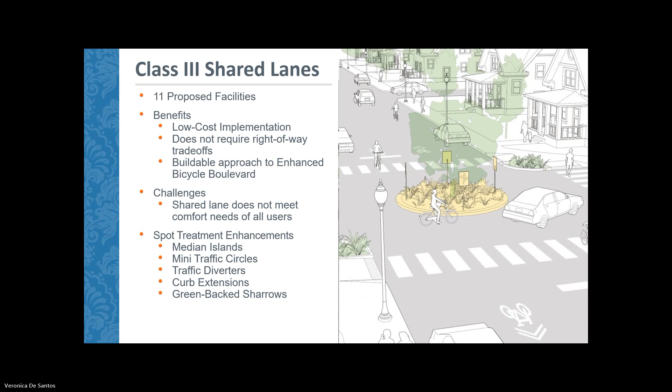In the next image we have traffic diverters. These are used intermittently throughout a corridor to redirect motor vehicle traffic to other roadways that will be more accommodating to carry that additional volume. It provides the bicyclist with gaps where motor vehicle traffic is lower, increasing comfort and decreasing stress. This wouldn't be a bicycle-only corridor throughout the entire length — just at intermediate or intermittent locations.

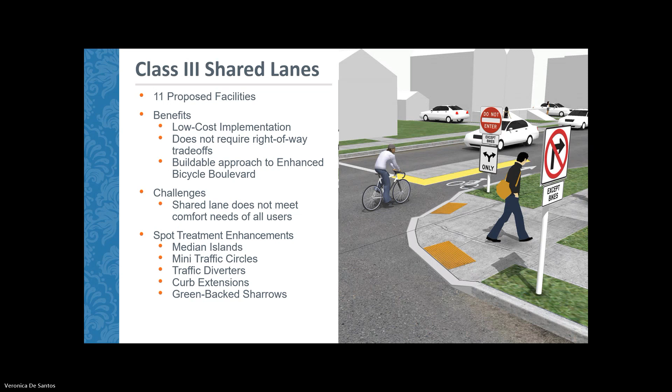The next spot treatment enhancement is curb extensions. Some of these have already been implemented in the city. They essentially increase the space around the curb, so motor vehicles must make a slower and tighter turn around, which calms traffic and enhances safety.

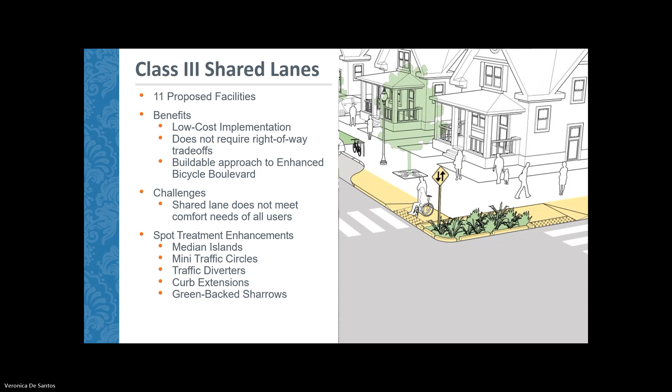And then the last one is green-backed sharrows. The standard sharrow symbol is just white on the pavement — these essentially elevate the visibility of the sharrow marking.

Next slide, please. The next class is a class 2 bike lane. These are quite typical, seen on locations around the city such as Harris and Henderson.

Some spot treatment enhancements that can be added to class 2 bicycle facilities include left turn bike boxes, shown in the next image. These are used at traffic signals: if a bicyclist wants to make a left-hand turn approaching the signal at a red light, they're provided additional space at the front of the travel lane so they can navigate to the left side of the roadway and make that turn when the light turns green.

In the next image, this is a second type of left turn facility for bicyclists in a bike lane at a signalized intersection. For this one, the bicyclist essentially completes the left turn maneuver in two movements — as you can see in the bottom right-hand corner, there's a bicyclist approaching the intersection.

If they wanted to make a left turn from here, they would continue straight through the bike lane and then pull over slightly to the right to queue in that green box. That would be on a green light, and then they would wait for the green light in the direction where you can see the white sedan traveling. Once that light turns green, they would be able to continue through the intersection and make that left-hand turn.

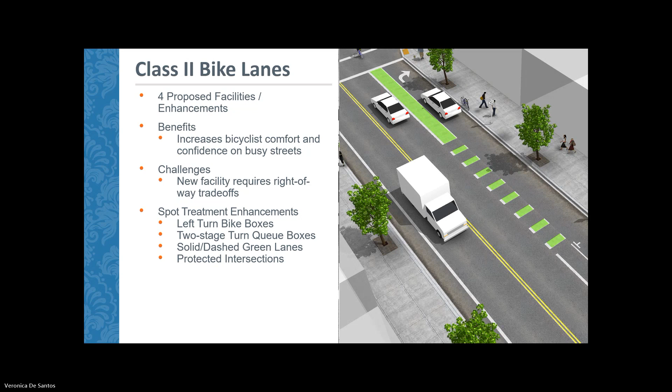For the last one, we have protected intersections, which essentially utilize paint and curbs in extension of the existing curb, where you see many of the pedestrians in this image, so that vehicles making a right turn through this intersection complete a slower maneuver, a tighter right turn, and the bicyclist is protected using those curbs which surround their queuing area.

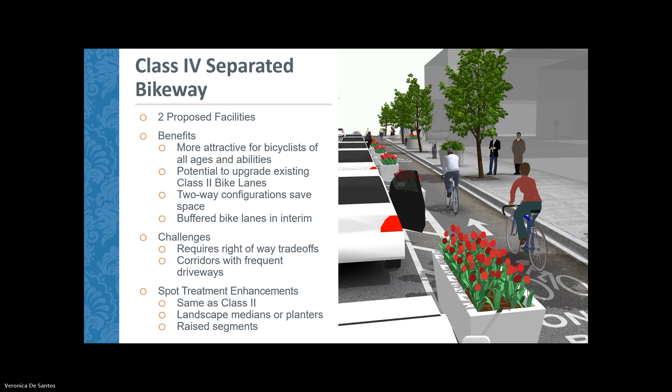So those are the 4 primary types of bikeway facilities that we'll be presenting in this plan. In the next series of slides, we'll be getting into the different corridors that are proposed, and then the public survey that we have open for this phase of the project.

We do have on the next slide some additional spot treatment enhancements. As we further the Eureka bike plan and start identifying which corridors are most prioritized by the community and by different metrics that illustrate the corridor itself will be successful in implementation or qualifying for grant funding, that's when the design of spot treatments on the corridor itself will start to be developed.

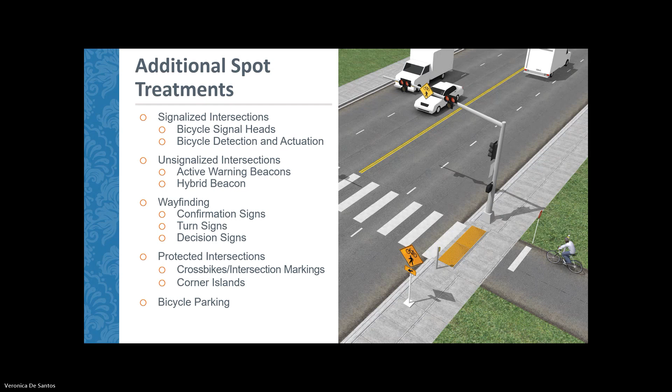And there's a couple locations where these are implemented within the city already, such as at the intersection of Spring Street and Henderson Street. And then the next image includes wayfinding. So wayfinding is a beneficial way to help guide bicyclists through the network and make decisions based on where they're trying to go. So we all use some form of Apple Maps or Google Maps on our phones, and this is essentially just a physical mapping device for the bicyclist so that it lowers the stress on them as they're trying to navigate to where their destination is.

And then second to last, we have protected intersections again. So this is just another example from a different perspective. So you have some cross bikes through the intersection, which are those green dashed lines. Cross bikes, you can think of them like crosswalks. It essentially delineates the bicyclist path of travel through the intersection. And then you can see on the left in the image the corner island of concrete so that the vehicle would essentially make its turn around that.

And then in the last image, we have bicycle parking. So depending on where the top corridors are and where the most activity occurs, bicycle parking could be an improvement near key destinations.

Okay, and then we'll go ahead and jump into the overall map. So what we have here is the city of Eureka, and in the 4 color codes, we have the different classes of bikeways that were just discussed. What you see in solid lines are bikeways that are currently existing or programmed. So when we say programmed, we mean that it has been funded through construction and it is going to be part of the network in the next couple years. So we've shown these programmed improvements as existing so that we can better understand where to propose corridors in order to create a full network.

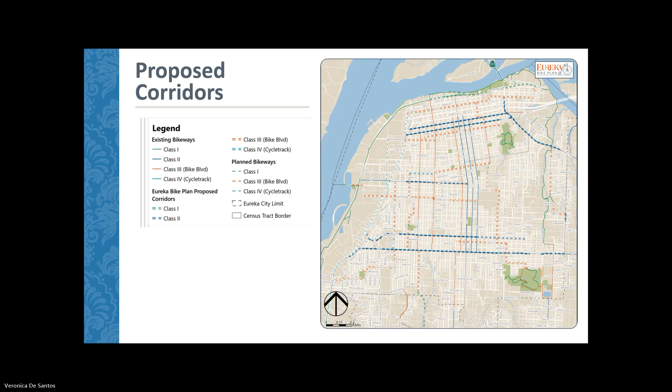The link will be active for 2 weeks. That's all that Mentimeter will provide. At that point, we'll go ahead and refresh the link and provide an updated one. So the survey will be open for a total of 1 month. So you can complete the survey now, or you can complete it at a later date if you want to have more time to review the proposed corridors. But all participants are limited to 1 response.

So the first question that will be presented to you when you open the survey is one in which you're assigned 100 points. And then the task for that first question is essentially assign the 100 points to the corridors that you would prioritize the most. So you could essentially choose 10 different corridors which you prioritize equally, or you could choose one corridor that you prioritize the most and assign all 100 points to that corridor. It's up to you. You can do any split of that 100 points in groupings of 10. And this essentially will indicate to us which corridors are top of the list in terms of the community's preference.

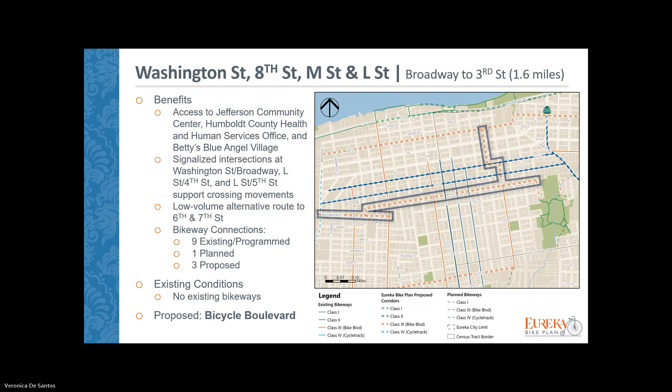Hi there. I'm going to give Jay a little break. Thank you, Jay, for all that. And as a reminder, we'll walk through each of these corridors. And then the idea is that everyone has an opportunity to use the Menti survey tool to weigh in and help provide your input, whether you're participating tonight in real time in the workshop or after the fact and just watching the video. So I wanted to take a couple slides and talk about two corridors in particular.

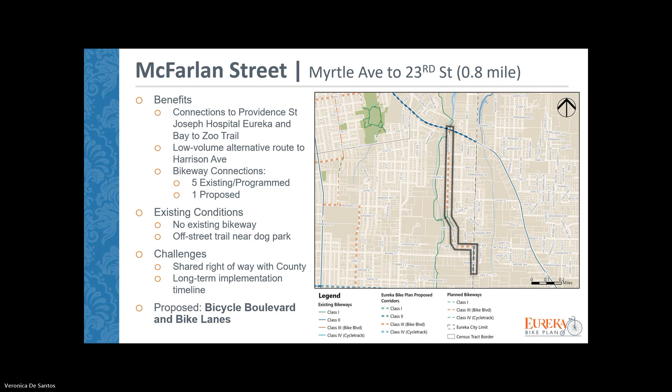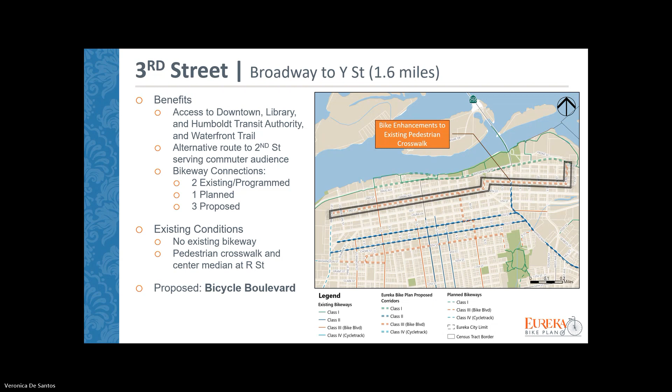And then with each of these, as Jay has mentioned too, we've identified some of the benefits. So we talk about access in the downtown, connection with the transit authority, other important facilities like the waterfront trail or the library in the downtown area here. Today, there's no designated bikeway here, and the bicycle boulevard would provide that opportunity to really encourage and enhance bicycle travel in the east-west direction there. All right, I'll hand it back off to Jay for a few more.

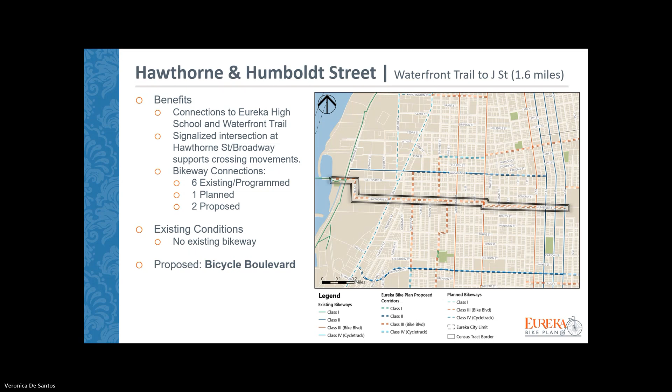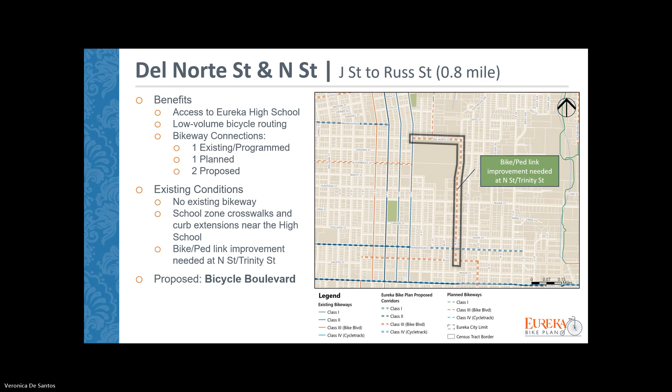It's essentially a section of the roadway that is foliaged. So it's between a couple trees, and it's currently used by bicyclists and pedestrians. So vehicles cannot travel through it, which creates what is like a natural traffic diverter. So therefore you already have lower traffic volumes on N Street. So this corridor would look into providing some improvements at those locations with the foliage. So this would benefit high school students who could then use the corridor to travel to the existing bike lanes on J Street, and potentially some of the other proposed corridors that are included in this list of 17. And then we can go on to the next corridor.

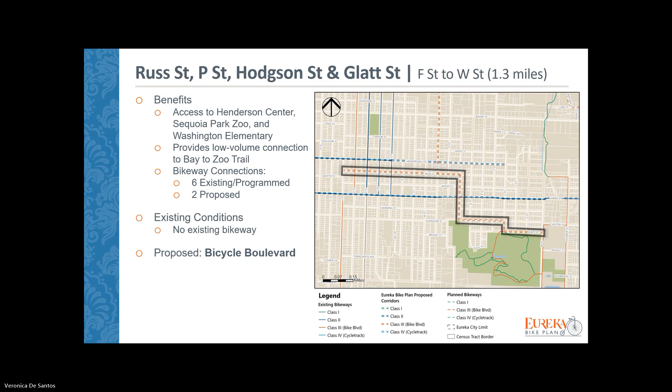Okay, back to you, Jay.

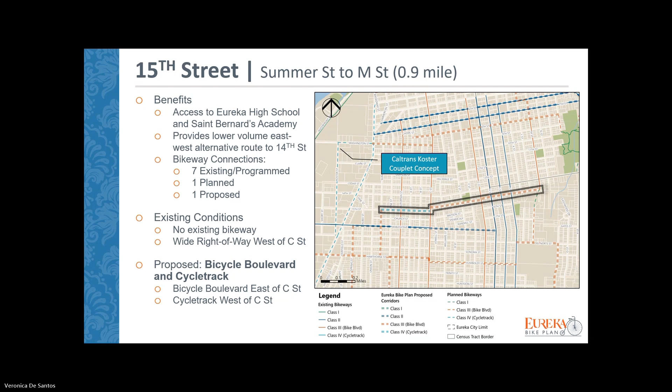Here we have Spring Street, similar to the last one in that it consists of two types of facilities, between Wabash and Harris Street. It's a bicycle boulevard on the northern end, accessing local transit stops and the Winco supermarket. We originally identified Fairfield Street for a north-south connector, but found the vehicle volumes and speeds there might be too high for a low-stress, comfortable bicycling route. So we looked at adjacent corridors, and Spring Street stuck out as one that could be high comfort.

It has existing rapid rectangular flashing beacons at the intersections with Henderson and Harris, so there are already curb extensions and enhanced crossing facilities for pedestrians that a bicyclist could also benefit from.

The Class 4 facility we're proposing between Henderson Street and Harris Street would essentially be on the westerly side of the roadway, with the two lanes of bicycle travel condensed into one side. This is because the westerly side of Spring Street in that block is adjacent to the shopping center and already has limitations on parking. It's currently commercial parking, so you wouldn't be taking away residents' parking. There are also only two driveways entering and exiting the shopping center, so fewer movements where a motor vehicle crosses the bikeway means less potential conflict.

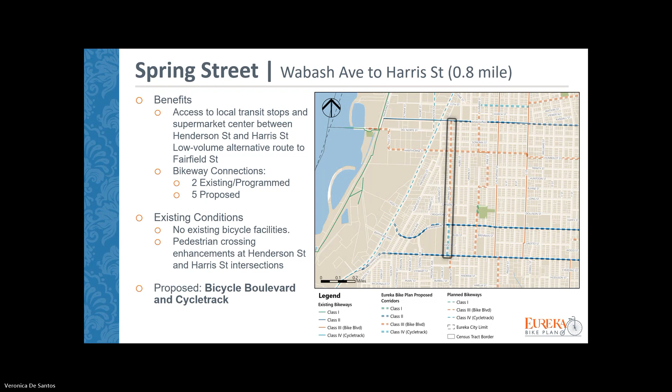We were looking at this roadway and thought it would be a great opportunity to provide a higher comfort level bikeway facility, such as a Class 4. And then we can go ahead and advance to the next slide.

A few blocks further east, we also have Summer Street. This also provides good north-south connectivity, between 15th Street and Harris Street. It provides access to downtown through connecting bikeways, Zoe Barnum High School, and the Food for People food bank.

Right now there is Da' Yas Park in the middle of it, with an existing pedestrian walkway that a bicyclist can use to cross through the park. This park is planned for upgrades as part of the park master plan, and the Eureka bike plan would propose upgrades to a trail through the park so bicyclists can more comfortably use it, with more separation from pedestrians currently on that trail, so everybody can use the facilities through the park happily.

So when you have a facility such as that, an off-street trail through a corridor, you essentially have one of those natural traffic diverters. The result would be less vehicle traffic on the same corridor, resulting in a lower stress facility. It would jog to Pine Street briefly just because of the existing roadway network. It doesn't have a straight cut through right there, but you would navigate back to Summer Street as you're continuing north.

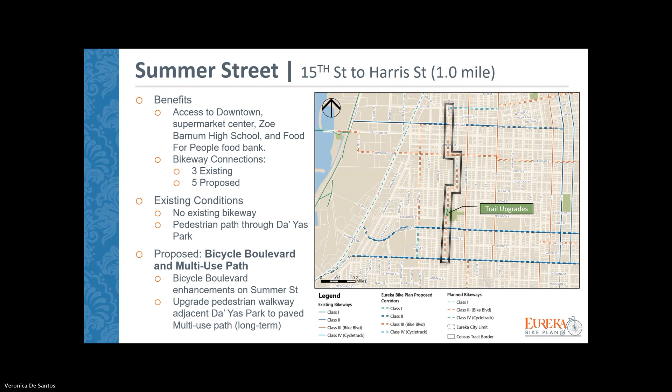All right, I wanted to talk about First Street. So now we're in the downtown area again, in between C Street and over towards H and I in that direction. Currently, this is where the trail, the actual off-street trail, terminates as you come up from the southwest. The trail serves both bicyclists and pedestrians and is separated from car traffic. Right at C Street it ends.

So then as a cyclist, you would be directed into the roadway to continue riding along First or Waterfront in that area. We have a two-phased approach: in the near term, make some bicycle boulevard treatments and identify wayfinding and the route through the area. With the benefit of a master plan, you can also throw out some long-term concepts for improvements. In this case, we'd like to explore the idea of continuing that separated space for people to bicycle and walk, maybe a cycle track or off-street multi-purpose trail for both bicyclists and pedestrians, shown dashed, going in the easterly direction but serving both directions.

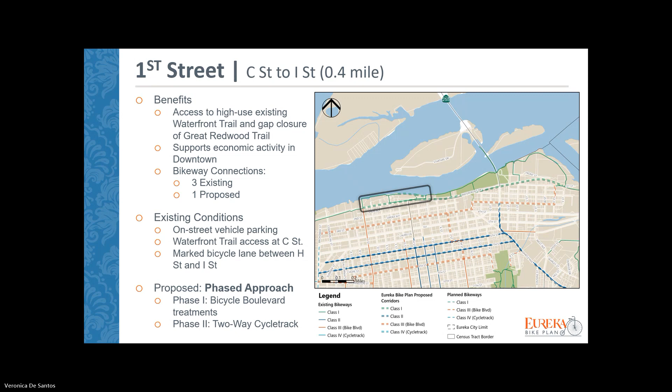So continuing in that area, as you go east, the railroad tracks that are in the roadway around H Street transition to a separated space going east. We have both the roadway, Waterfront Drive, and the trail or railroad corridor, and at that point, east of H Street, they separate. Today, along Waterfront Drive, the city has striped bike lanes. There's been interest in the community and from the Great Redwood Trail Agency to look at opportunities for adding a bikeway or multi-use trail separated from the roadway within that rail corridor.

So we had the lines on the map to continue coordinating with the Great Redwood Trail Agency on how to make that happen, recognizing that in this area the railroad tracks are currently in the ground and there are still some issues to work out. I want to highlight that what we've outlined shows Waterfront Drive and the railroad corridor, and as a reminder, there's that solid green line for the bikeway that goes east of the Adorni Center and under the 255. It loops around and is along the water's edge. The city does have plans for making improvements there to straighten out some turns and jogs, and also provide fresh pavement. So there are a lot of opportunities in this area to travel east-west, along with some long-term ideas for additional improvements.

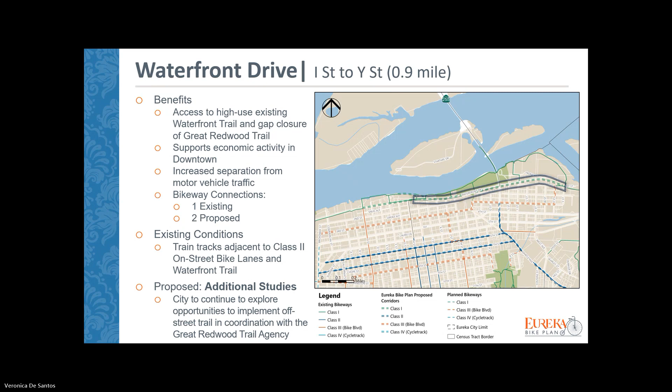Okay, thanks, Paul. On the next slide, we have Wabash Avenue between Spring Street and H Street. This corridor already has existing bike lanes, so we didn't want to overlook those. This bike plan would propose enhancements to those existing bike lanes, such as what was described at the top of this presentation. This corridor provides access to Costco, Humboldt Senior Resource Center, and commercial storefronts on Broadway.

Our proposal is to provide bikeway enhancements up until Spring Street on the westerly end, then provide proposed corridors for access to other routes to cross east-west or travel north-south. This is because the Caltrans Koster couplet concept is planned along Broadway, with the intersection of Highway 101 and Wabash planned as where the two directions of vehicle travel will reconverge. We're looking years in advance to provide a bicyclist network that would go around that intersection for a higher comfort level of navigation. On the east side, it would extend up to H Street, where the city currently has programmed bicycle lanes incoming.

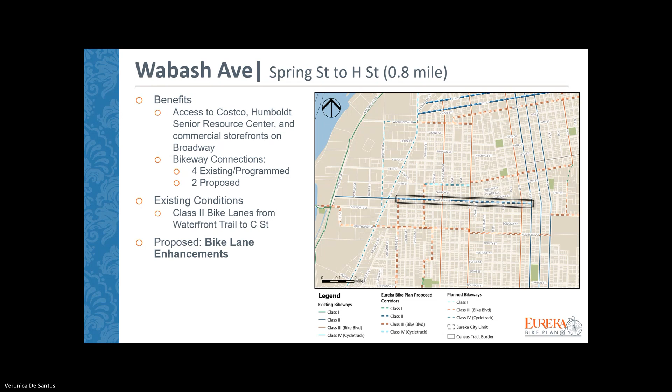Moving to the next slide, here we have Henderson Street and Harris Street. These two already have Class 2 existing bike lanes. On Henderson, that's between Fairfield Street and I Street, and on Harris Street, that's between Fairfield and Harrison.

The proposal has two aspects: providing bicycle lane enhancements where bike lanes currently exist, and closing the bike lane gaps. On the westerly end, we'd extend those bike lanes down to Broadway, since there's about a block or a block and a half where the bike lane doesn't exist. That would connect well with the planned improvements on Broadway by Caltrans, which includes a Class 4 cycle track.

These two couplet roadways, one direction each, provide access to schools, commercial retail, and Sequoia Park. We'd also look into spot treatment enhancements, particularly along Harris Street. We heard very beneficial feedback from students at St. Bernard's—youth don't always have licenses, so they're often walking or bicycling throughout the city. We heard great feedback from them about where it's challenging to cross these two primary roadways surrounding the school. So we'd look into spot treatment enhancements based on their feedback, as well as feedback from the general community in public engagement survey number one.

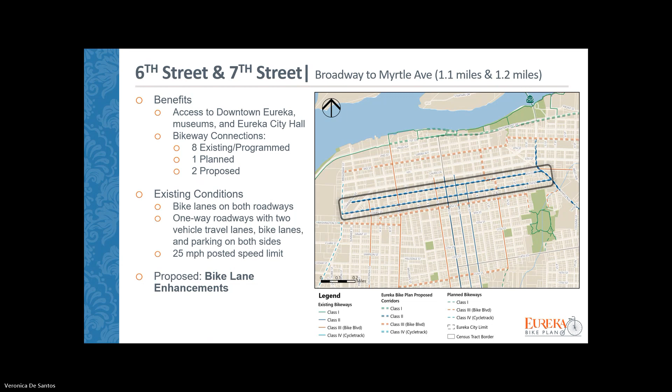Okay, thanks, Jerry.

This concept is really about how we can enhance the on-street bike lanes that exist there today. The city has some programmed money to make improvements along Myrtle west of the roadway called West Avenue, so some of that's coming soon, and we've spoken with them a lot about exploring what additional improvements could occur.

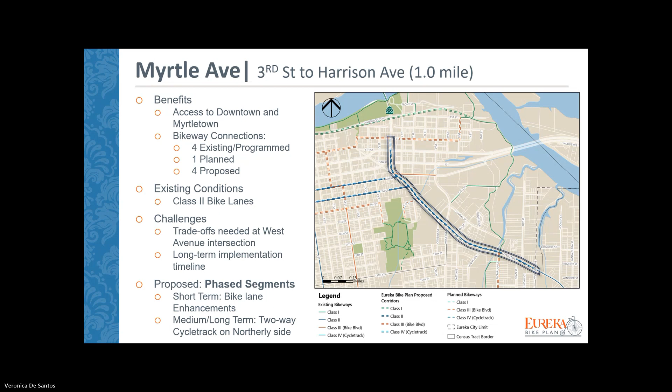So how does it navigate that West and Myrtle intersection, which is busy, and how do you still provide the travel lanes and parking that is desired by the community in this area? This falls into one of those categories of providing an opportunity with a line on the map, identifying and exploring what those trade-offs are, those concerns, and keep looking at how that can evolve over time.

Is Jay there? Jay, are you there? Yeah, froze on my end. Are we all synced up again? Can you hear me? Good. Go ahead, Jay.

Okay, so we have our 17th and last corridor that we're presenting as part of this proposed list of corridors, and this is California Street. This is the one slide where north is oriented to the left rather than up on the map, so we have to shift our perspective a little to understand where this is at. This is in the southern edge of the city. If you look at the map, where you see that dashed black line, it travels up and down on the page—that is the city boundary. So north of that line is within the city of Eureka, and on the existing California Street, we're essentially proposing a Class 3 bicycle boulevard.

Further south of where California Street currently exists, there is a set aside for a roadway—a sort of easement or right-of-way within the county in case a roadway is needed in the future. This set aside continues further south and re-enters the city of Eureka within the municipal golf course. So what we're proposing is that in the long term, the city and the county will coordinate and implement an off-street trail throughout that roadway set aside.

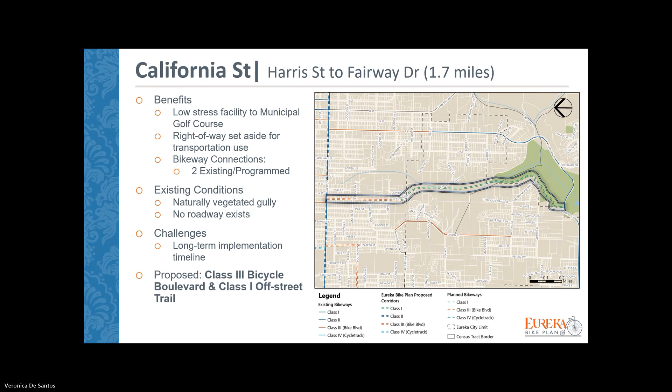Okay, so then we'll keep going. I think Jay's coming back, but we'll give you a minute.

Jay, it looks like you're back. Do you want to do this or shall I? You're on mute. Last I saw, I was speaking during the California Street slide—I'm not sure what you guys heard or not. Yeah, you were almost there. I finished up California and then I just started on this one, but I'll keep going, and then Jay, you let me know if I'm missing anything.

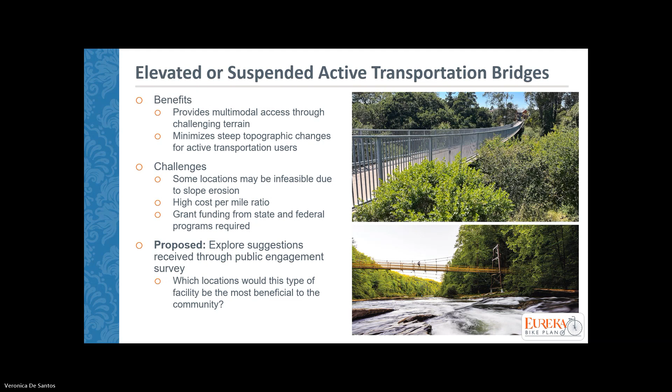And then within the Mentimeter survey, so we can go ahead and advance to the next slide. There are a total of 4 questions. So the one inquiring where you would be interested in seeing that sort of bridge structure, that's the 3rd question. And then the 4th question is an open-ended response form.

You can submit as many times. So if you have any specific comments on any corridors, then you can go ahead and provide those in question number 4 on the Mentimeter. We ask that because we hope to receive a lot of responses. We ask that if you have comments on different corridors, that you submit the different comments in different submissions. So you can enter a comment and then it will ask if you want to enter another comment. So if you separate your comments out by corridor, that helps us review and analyze all the answers efficiently.

I'm going to go ahead and present what we have collected so far in terms of the prioritization, so the assignment of 100 points. I want to reiterate that what I'll show you today is a reflection of the responses that have been collected to date. This survey will be open for 1 more month, and so these results will change and vary as we collect more input from additional members of the community. So we can just keep it on this slide for a minute and I will load the results.